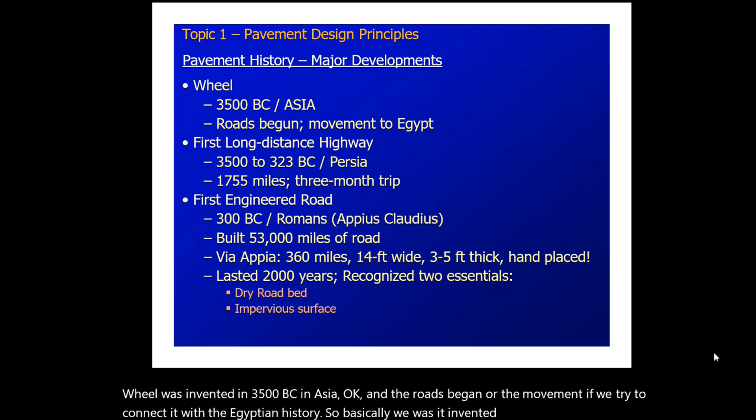The roads begin, or the movement, if we try to connect it with Egyptian history—basically the wheel was invented at the same time. If we try to understand when exactly long-distance highways were actually built, you can imagine the time of Great Persia, from 3500 to 323 BC.

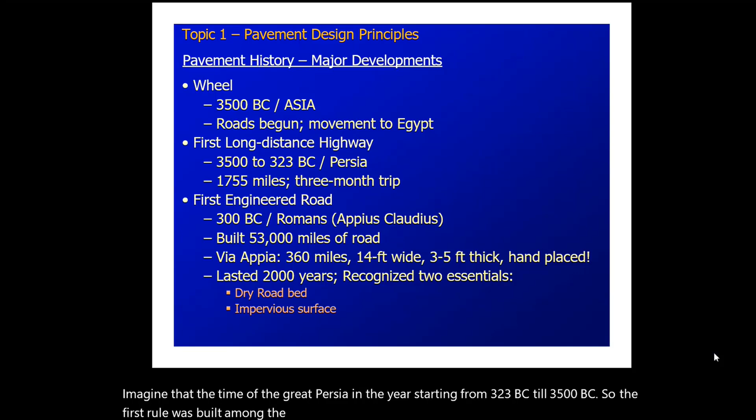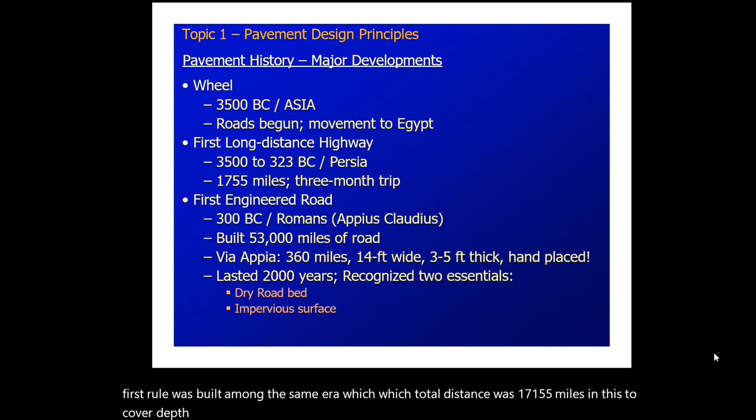Till 3500 BC, the first road was built in that same era, with a total distance of 1755 miles, and it took almost 3 months to cover that journey. You can imagine where our forefathers were standing before.

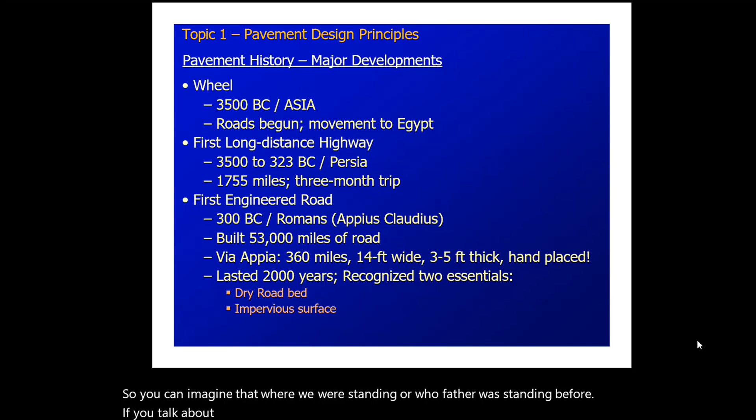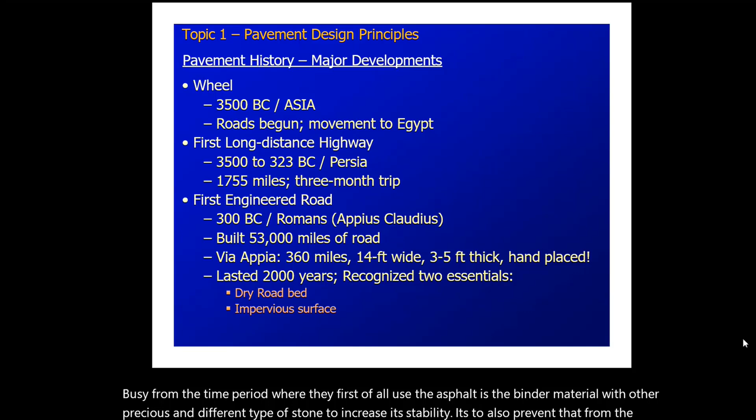Now, if we talk about the first engineering road, it was recorded around 300 BC, from the time period when they first used asphalt as the binder material along with other precious and different types of stone to increase stability. It also helped prevent waterlogged surfaces and provided a waterproofing technique. They also came up with cementitious materials as well.

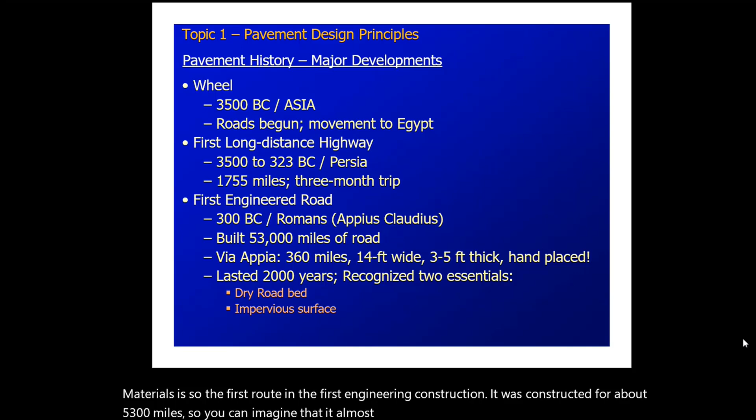The first engineering road construction was about 53,000 miles, and you can imagine it lasted almost 2000 years. They only came up with two ideas: a dry road bed and impervious surfaces.

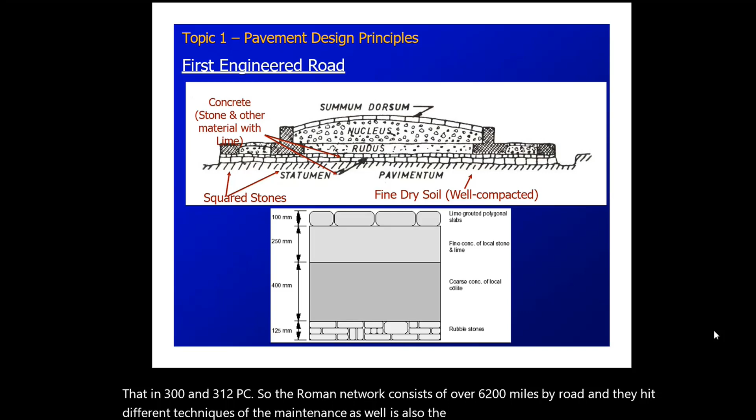The oldest Roman roads are still in use today. As you can see in this figure, around 300 to 312 BC, the Roman network consisted of over 6,200 miles of roads, with different maintenance techniques. They also introduced the basic system which is still used in the United States today.

Although Roman roads did not use asphalt as a binder, they did often use lime grout and other natural pozzolan materials in typical Roman road construction.

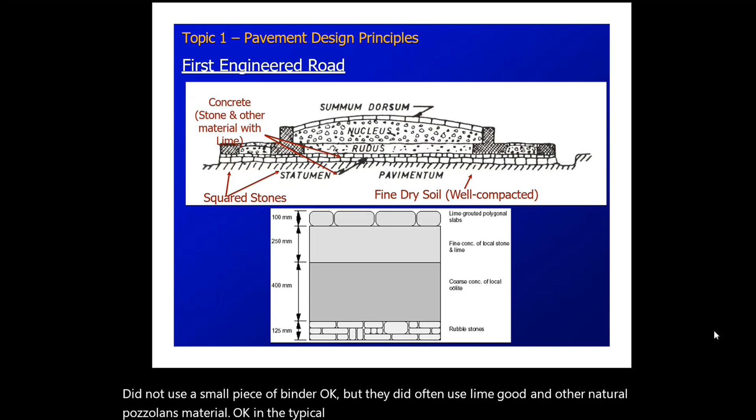As you can see in the first picture, they used different sized squared and dry stone at the very lower level, then different sized stone at each level, at the rudus as well as at the nucleus. The top surface was grooved and curved to increase drainage capacity.

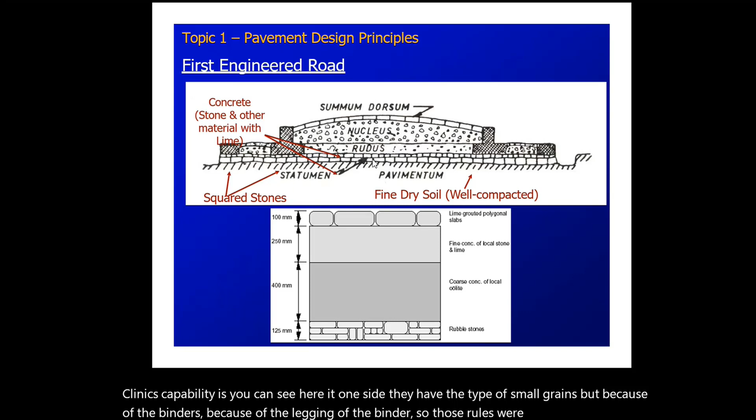But the only issue with those roads was that they did not have enough drainage capability. You can see on one side they had small drains, but due to lacking binder, those roads, constructed at that time, were still considered among the first engineering roads compared with recent techniques.

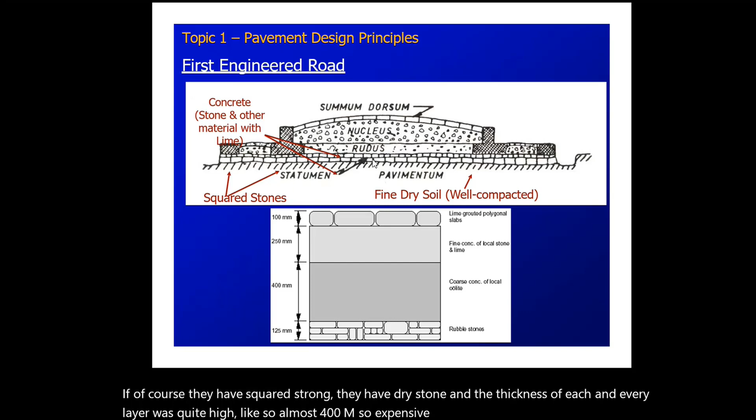Of course, they had squared stone and dry stone, and the thickness of each layer was quite high, almost 400, which shows it consisted of massive labor work—you can imagine.

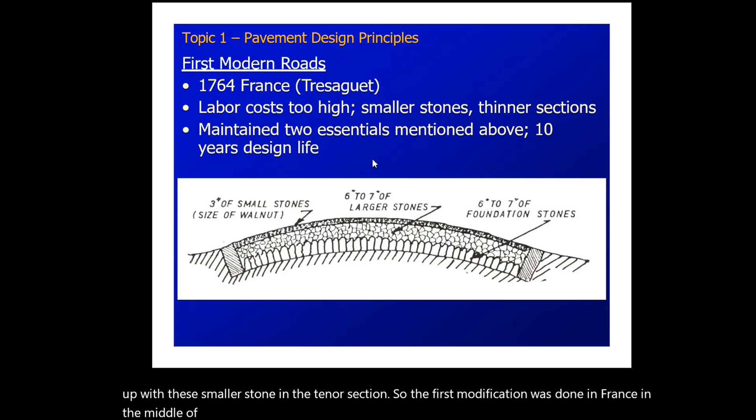The first road was built in France, Tresaguet, where they had too much labor cost, so they came up with smaller stones in thinner sections. The first modification was done in France in the middle of the 18th century. The design took almost 10 years to modify, and the total design life of that specific pavement was about 10 years.

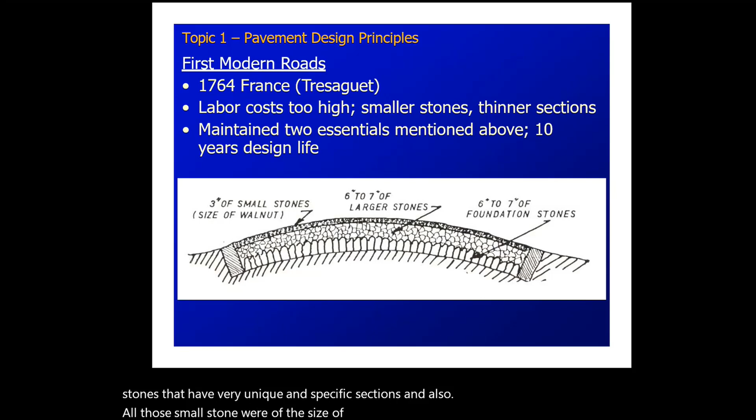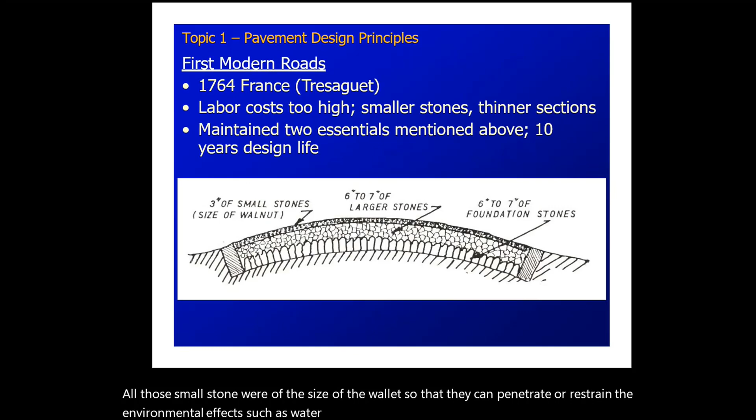As you can see, they used different types of stones across the whole curved section. The only difference between the Roman road and the first modern road is that they came up with a completely curved type of construction, and they also used specific types of stones at very unique sections. All those small stones were the size of a walnut, so they could restrain environmental effects such as water, so it should not touch the lower surface.

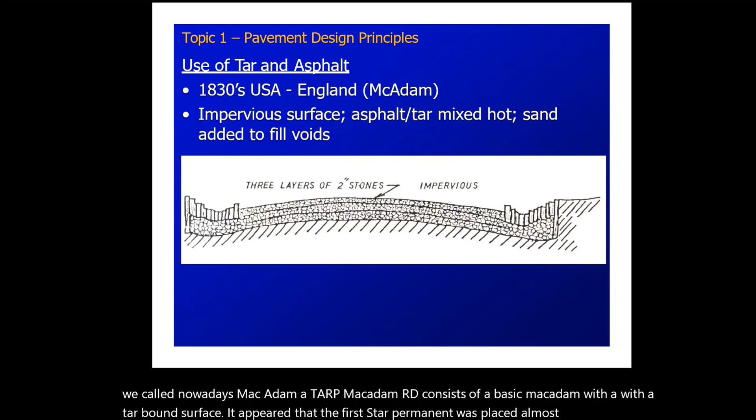If we talk about the 1800s and 1830s, the first road was constructed from tar and asphalt, which we nowadays call macadam. A tar macadam road consists of a basic macadam with a tar-bound surface. It appears that the first tar pavement was placed around 1848 or 1850. At that time, such pavements were considered suitable only for light traffic, but if we talk about using it for heavy traffic, those stones may not work.

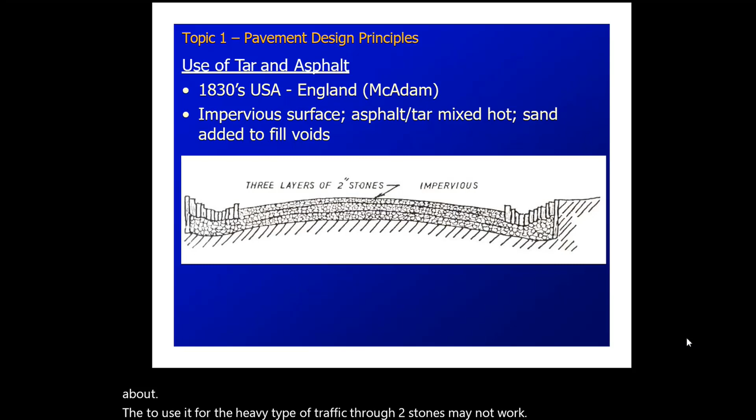If we talk about road construction, we've been through different stages. In 1850, the first Portland cement concrete was built in Austria, but due to its weak stability, it did not sustain for a very long time.

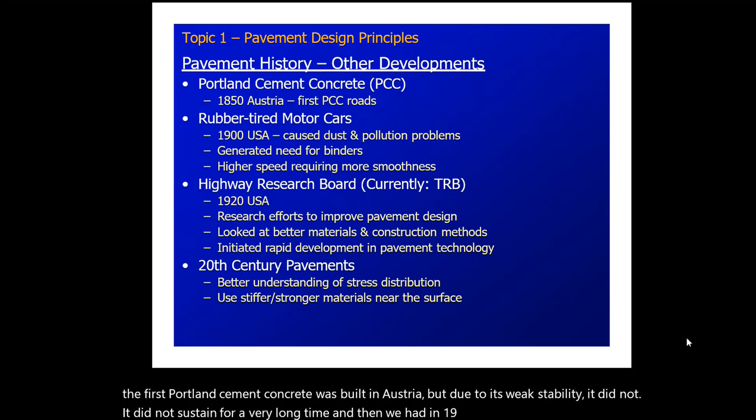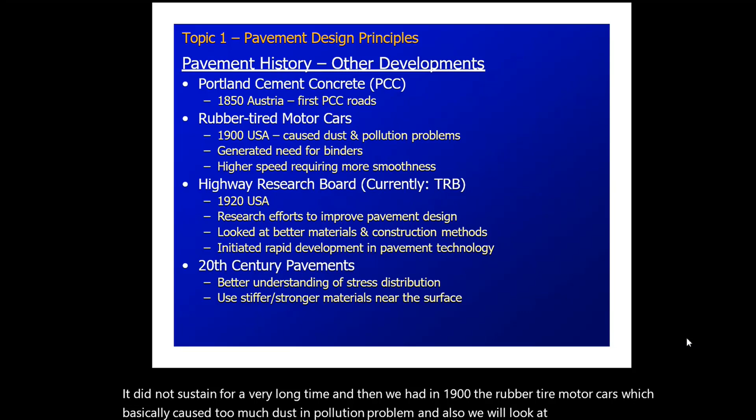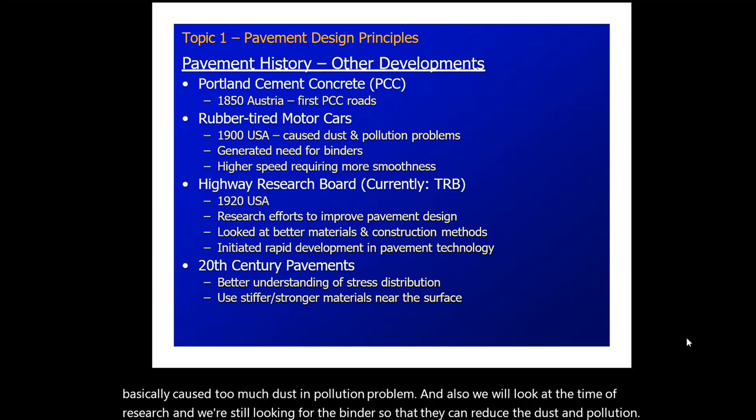Then in 1900 we had rubber tire motor cars, which basically caused too much dust and pollution problems. Researchers were still looking for a binder so that they could reduce the dust and pollution. And of course, high speed requires more smoothness, so with the increase in speed, the same dust and pollution issues were also increasing.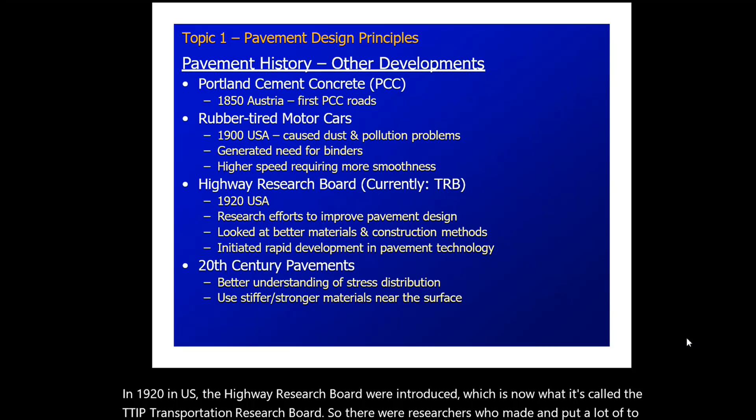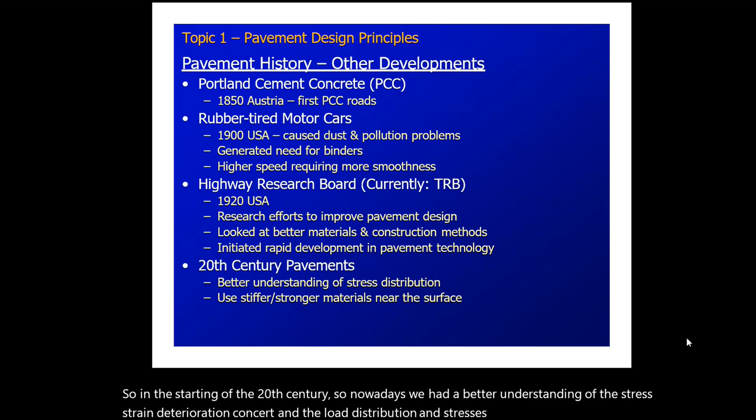In 1920 in the US, the Highway Research Board was introduced, which is now called the TRB, Transportation Research Board. Researchers made a lot of efforts to improve pavement design. They hunted for binder materials and introduced different rapid development and maintenance strategies. At the start of the 20th century, we had a better understanding of the stress, strain, deterioration concept, and load distribution and stress distribution. We ended up with different binders, determining what type of binder should be used on which type of surface, and we introduced how we can use different binders to reduce pavement thickness and so on.

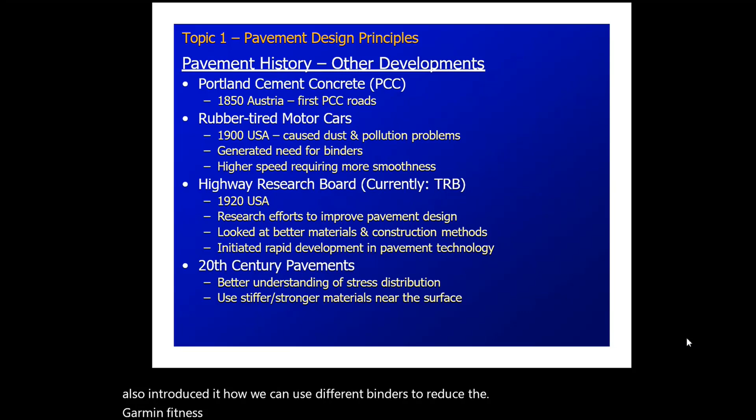As you can see in this structure, the pavement should consist of the shoulder, and there should be different types of binders at each and every layer, each layer being different according to the load parameters. The primary function of the pavement should be to transmit the load to the lower area, while a more flexible pavement contains sand and gravel or crushed stones and different compacted binders. The purpose of the pavement should be to reduce stresses to a very good level, and those stresses should equal zero before reaching the subbase and subgrade level.

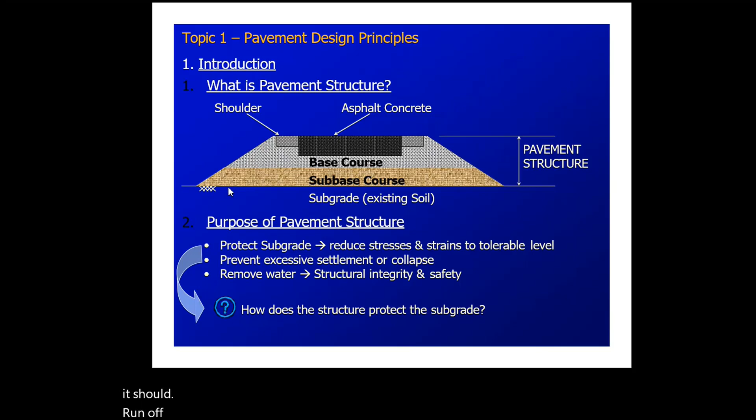So in the 20th century, now we understand that the pressure from the wheel develops in the form of stresses in the different material layers in the road construction, which basically causes the bending of the same slab due to traffic load, developing stresses within the pavement. Now we have almost reached the point that the stresses under the dynamic wheel load should be divided over a large area. Now we are able to understand and determine the different types of stresses at any level. We can also distribute and derive the vertical stress distribution along the horizontal as well as the vertical axis. So this is the 20th century understanding, and the same stresses could be increased or decreased with the increase and decrease in the stiffness as well as the thickness.

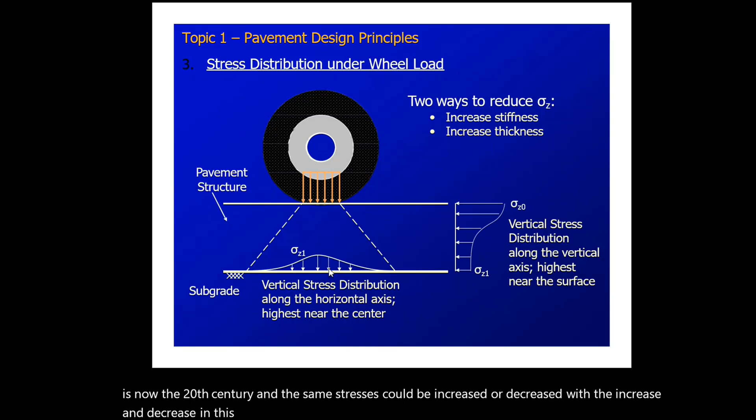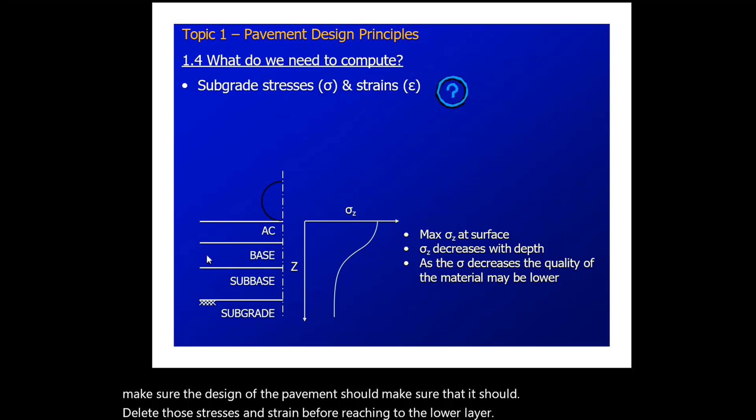And this is the very basic definition that subgrade stresses and strain follow a trend. The first thing you need to understand is that we will always have the maximum stresses at the top layer, but those stresses and strain will reduce with the thickness. So the design of the pavement should make sure that it reduces those stresses and strain before reaching the lower layer. And if those stresses do not reduce while reaching the subgrade level, then we might have issues.

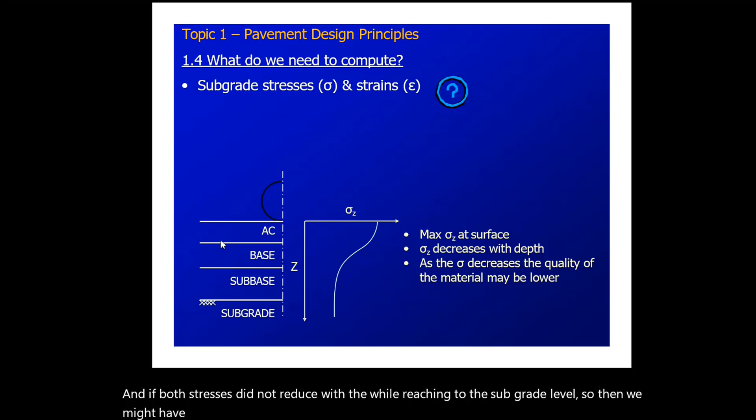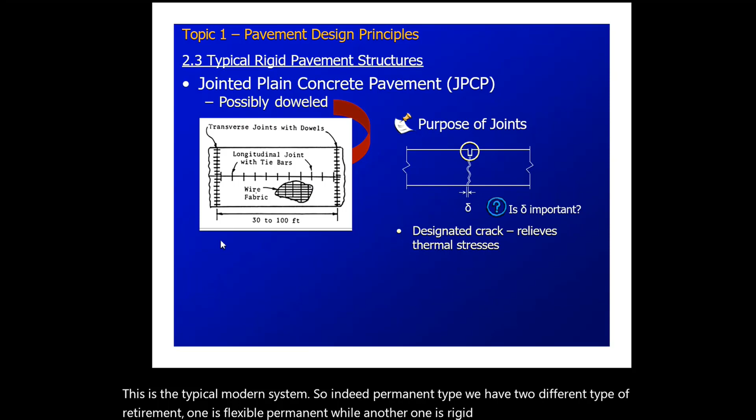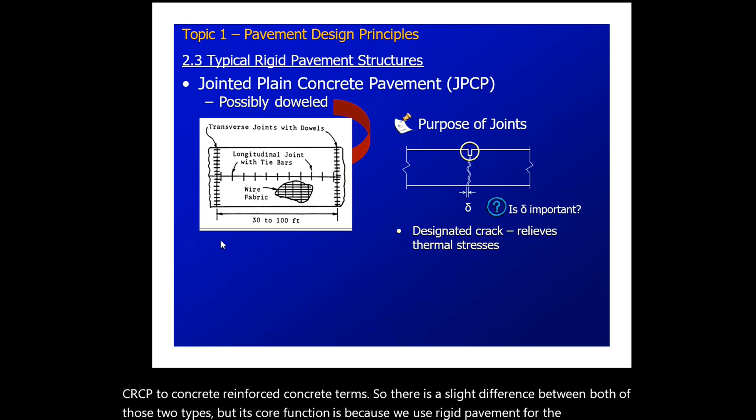This is the typical modern system. In the pavement type, we have two different types of pavement: one is flexible pavement, while another is rigid pavement. In rigid pavement, we have two basic types: one is called jointed plain concrete pavement, while another is called CRCP, continuously reinforced concrete pavement. There is a slight difference between these two types, but their core function is that we use rigid pavement for heavy loading, for heavy dynamic as well as static loading.

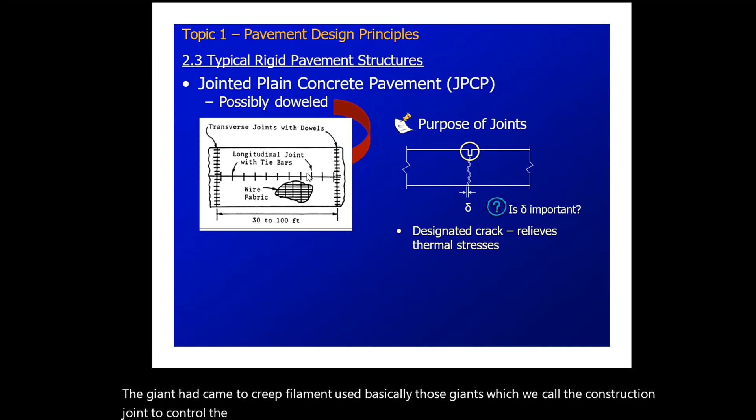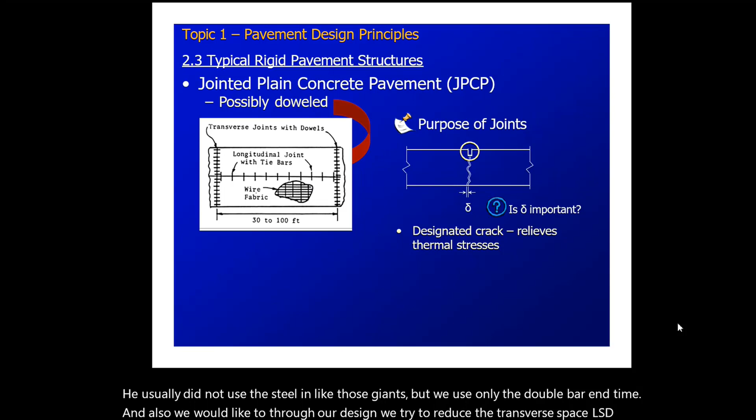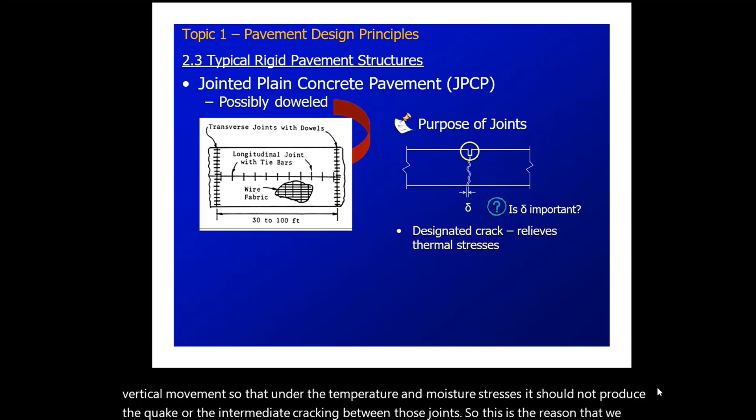So jointed plain concrete pavement basically uses joints, which we call construction joints, to control the cracking. We usually do not use steel in those joints, but we use only the dowel bar and tie bar. Through our design, we try to reduce the transverse as well as the vertical movement so that under temperature and moisture stresses, it should not produce quick or intermediate cracking between those joints. This is the reason we introduce or use the dowel bar and tie bar as load transferring agents.

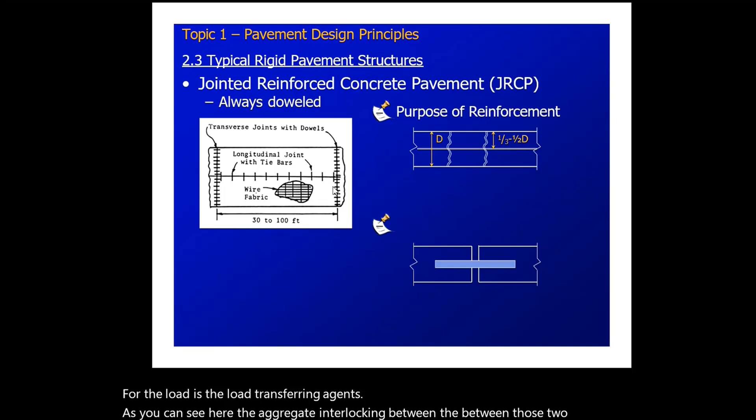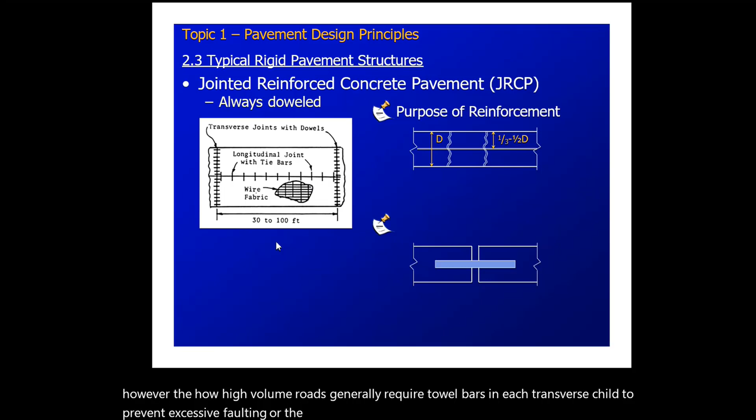As you can see here, the aggregate interlocking between those dowel bars is basically used for low volume road aggregate where the interlock is often adequate. However, high volume roads generally require dowel bars in each transverse joint to prevent excessive faulting or deterioration. As you can see in this specific picture, those two slices of the same road are connected in two different shapes. This is the reason we call it jointed reinforced concrete pavement.

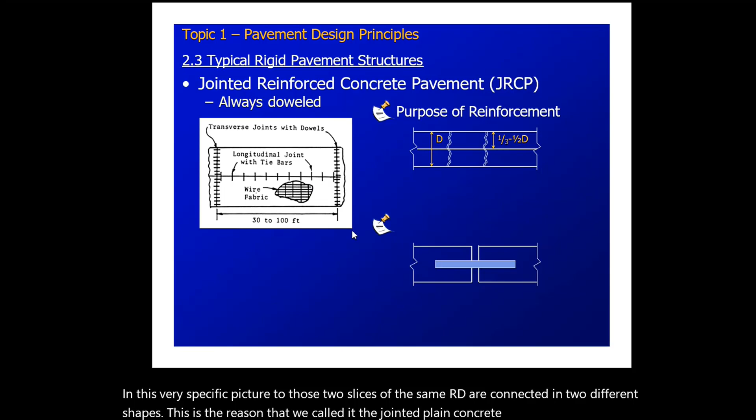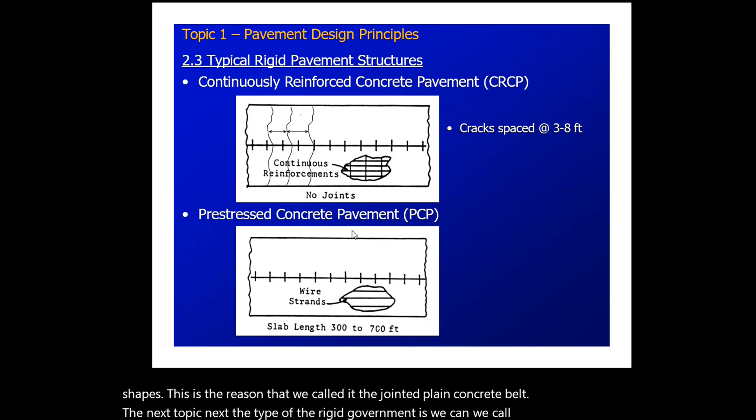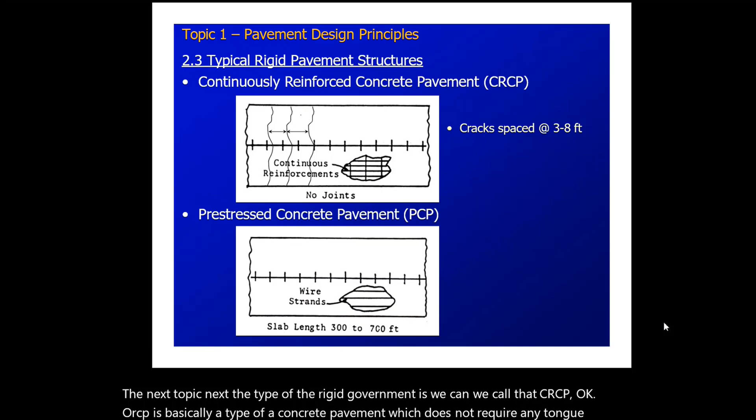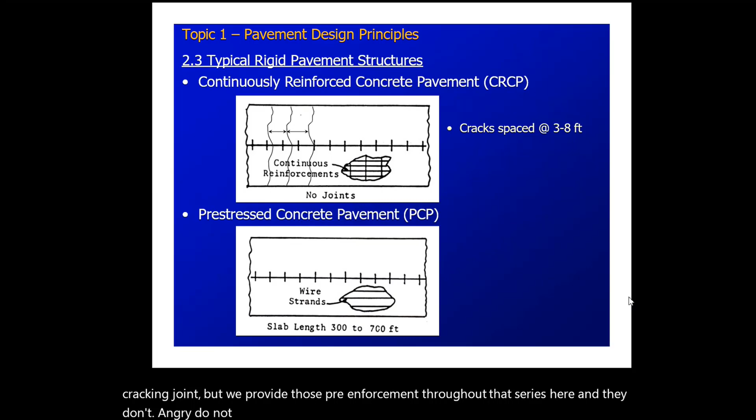The next topic, the type of rigid pavement we call CRCP. CRCP is basically a type of concrete pavement which does not require any transverse cracking joint, but we provide reinforcement throughout that series. Here, we do not have any joints, and CRCP always makes a good option to choose for restructuring, or for the selection whenever we have massive loads.

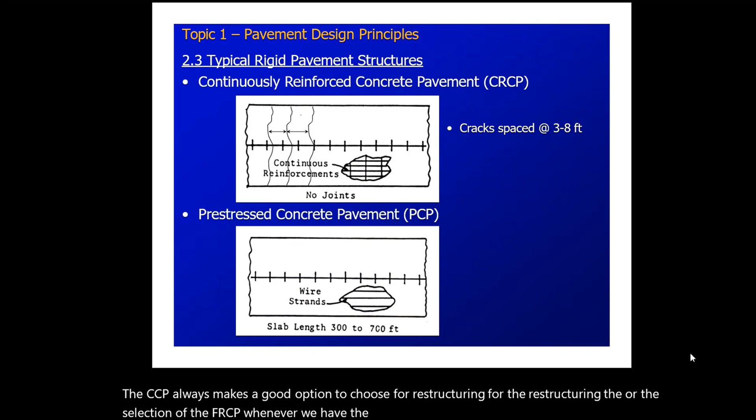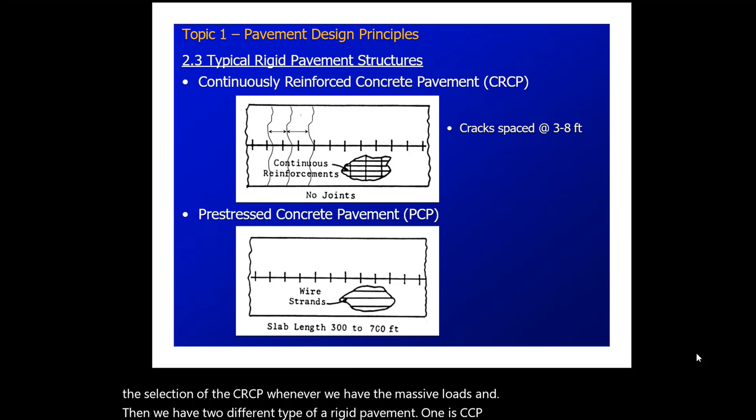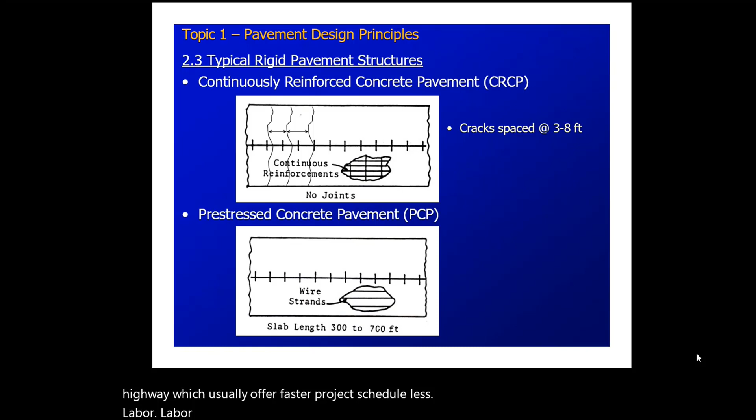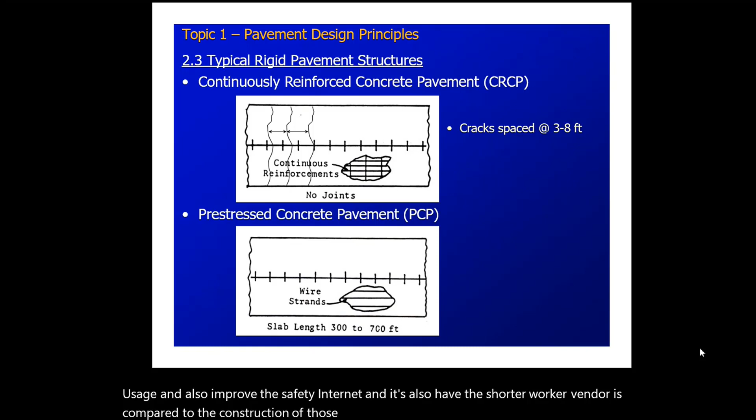Then we have two different types of rigid pavement: one is CRCP, while another is PCP, which we call pre-stressed concrete pavement. The pre-stressed concrete pavement is basically an efficient and lasting solution for rapidly building and constructing massive highways, which usually offers a faster project schedule, less labor usage, and also improved safety. It also has a shorter work window as compared to the construction of CRCP. Thank you very much. If you have any questions, please get back in the comment section.